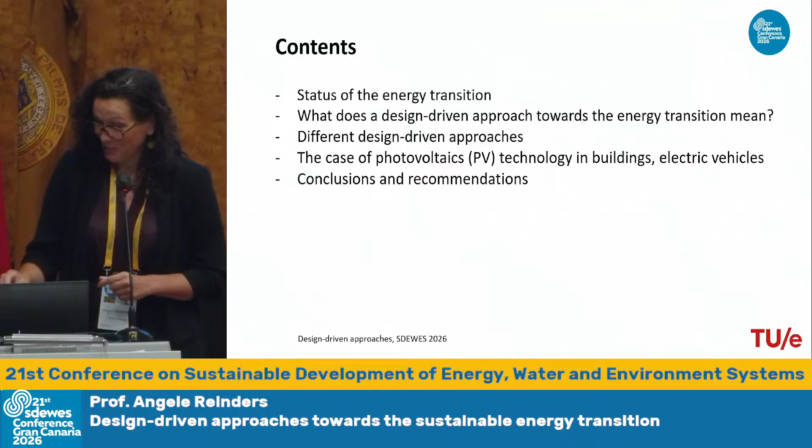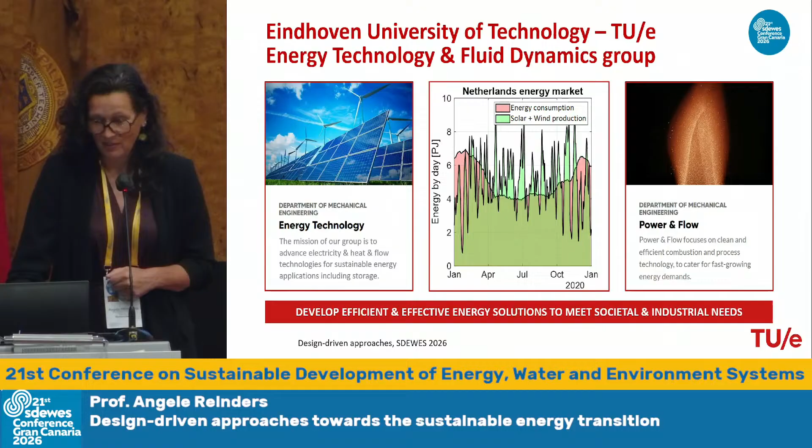But first, I'll tell you where I come from. I come from TU Eindhoven, and I work in the Energy Technology and Fluid Dynamics group, which consists of two different groups: one that develops sustainable energy technologies and storage means, and the other that works on combustion and making it more energy efficient, because in the energy transition you still have to deal with combustion. All that is meant to balance the Dutch energy system, and maybe also other energy systems abroad.

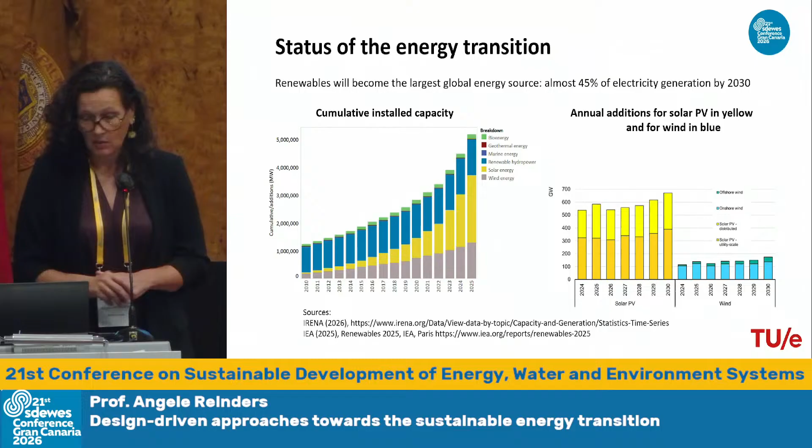Just a little update on the status of the energy transition, relying on the International Energy Agency and their beautiful reports. Actually, we're doing really well with the renewable energy transition—renewables are growing and growing. On the right you see the growth of photovoltaics and wind, and on the left, all the renewable installed capacity, which is going up exponentially. It's estimated that about 45% of all electricity generation will be renewable by 2030. That's really soon, so that's okay.

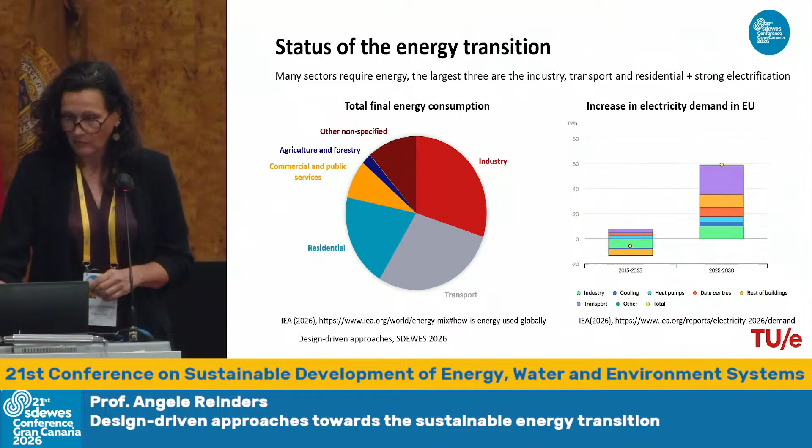As I mentioned, electrification of transport is a big deal, and we see a strong emergence of electric car sales everywhere. So car sales for electric transport are growing 20% globally. That's really a lot, and that means also that a large share of the car stock worldwide will be electrically powered. So I will come back to that later.

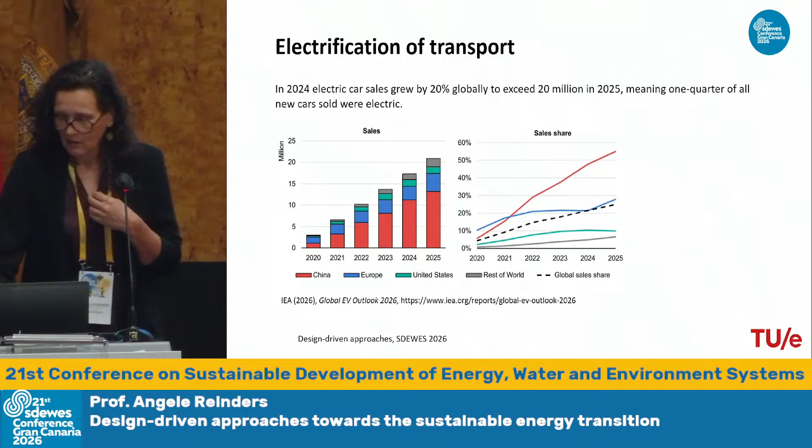And then there's a last development, that's grid congestion, because with all the changes in the energy supply and the large share of renewables, in some countries even close to 95%, like in Norway, but also in Germany and Netherlands, we have a lot of renewables. You see that the balance between production and demand gets a bit out of the expected.

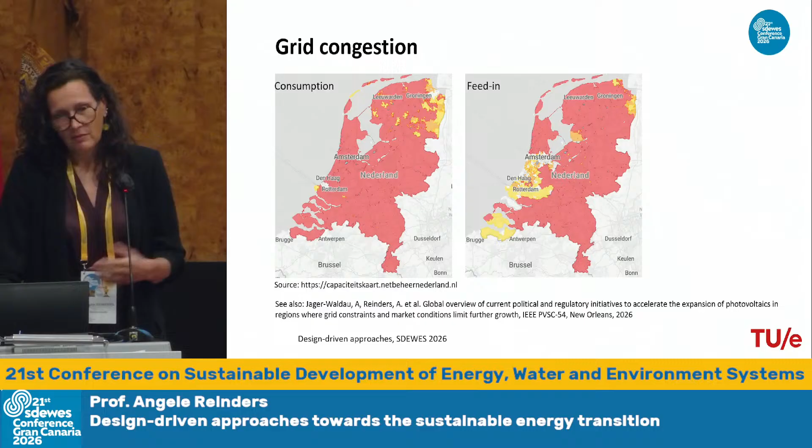Okay, so renewable energy transition is happening, and that also means that there's a lot of changes. And actually, I wonder then, in my research, what can we do to develop sustainable energy solutions that match with these trends that I just showed, and help to mitigate CO2 emissions, because despite all the renewable energy transition, we still have an upgoing trend of CO2 emissions, evidenced by measurements in Mauna Loa in Hawaii.

And I thought a lot about this, and I think about 12 years ago, I thought about another solution than just technology development. So I thought, sustainable energy is something we're going to need anyhow in the future, because you don't want to compromise future generations by the activities that we undertake now. That's according to the Brundtland report that was published in the 80s. But then, if you want to achieve that, then maybe you have to also consider how you change our environment and our system and our society in such a way that also serves our needs. And that can be done by a discipline called design.

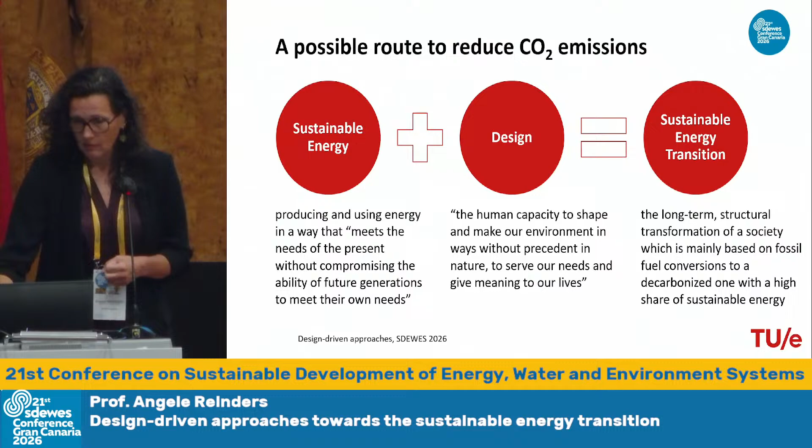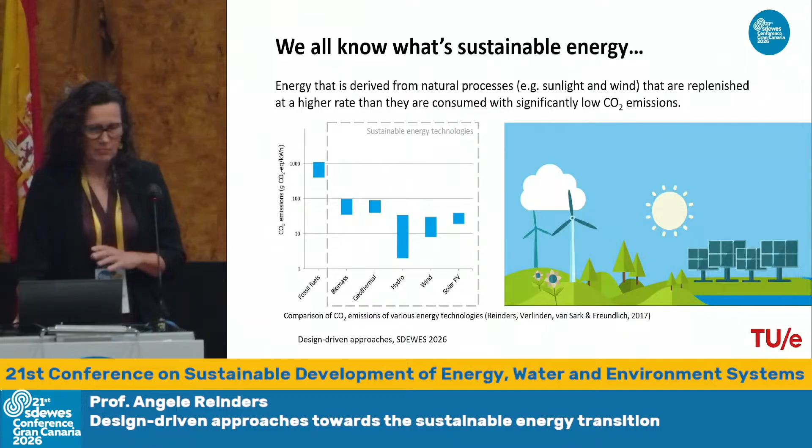So, in my opinion, if you add sustainable energy with the discipline of design, you can really enable a long-term structural transformation of society, which is mainly based on renewables, the sustainable energy transition. And this is, of course, related. Now, we all know what's sustainable energy. Sustainable energy is energy that's derived from a natural process that actually results in lower CO2 emissions than the traditional fossil fuel combustion systems, by a factor of 10 to 20 less. So I won't say that much about this slide, but the next slide is about what is actually then design.

And the discipline of design has a definition given by the World Design Organization that I show here. And it actually is a bit broader than you usually assume, because most of you assume that design is about making products, like for instance a chair or a table, but it's actually a strategic problem-solving process that drives innovation and builds business and leads to a better quality of life through innovative products, systems, services, and experiences. So it's much broader than just creating a chair and making it and using it.

And it actually means that those who can design have a transdisciplinary profession that harnesses creativity to resolve problems and co-create solutions with the intent of making products, systems, and services, etc. And usually it's indicated by a circular design process in which experience with existing properties of a current situation are evaluated by reflection. So you can conclude, for instance, using the example of a chair, this chair doesn't match the color scheme of my interior. That's a really important finding. It's also a value judgment. And then you analyze that, and then you compare different colors for the chair, and then recolor the chair.

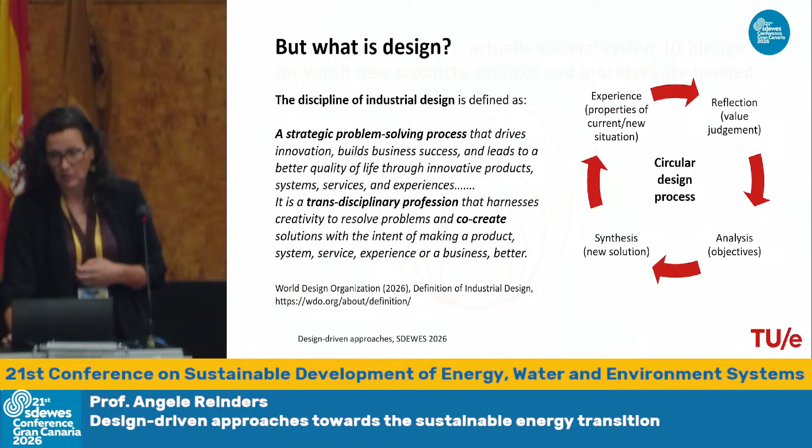Policies required to support sustainable energy transition. So the energy transition is not really a product problem, it's actually a societal system redesign that we have to go through. And for that change, we have to create new products, services, and processes.

And that's really well represented by these 4 design levels by Jones and Van Ael from University of Antwerp, where identity and artifacts are the first reason to design something, but that also can be seen in the context of products and services, in the organization processes, and then the systems and policies.

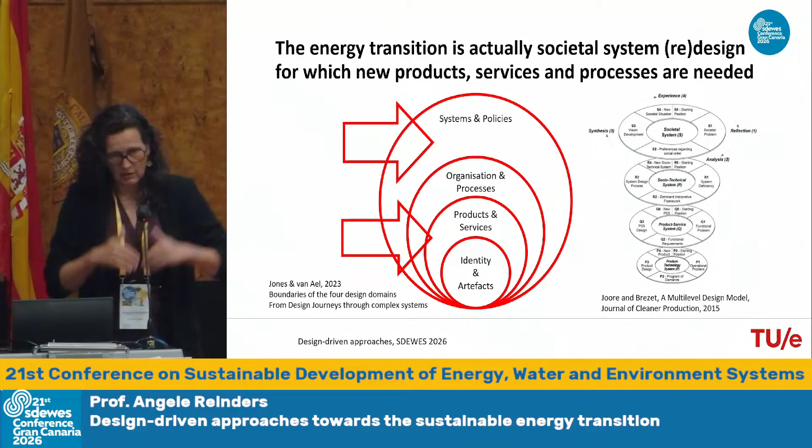And this can also be represented in more detail by a more complex overview, but also here you see the 4 levels. And then in every level you see the experience, the reflection, analysis, and synthesis. So it's all circular and it connects to each other at different levels. Okay, I won't bother you too much with all the details of all these methods, because there are many of those, I just showed 2 of them.

I would like to show what I did in this domain, and it's of course a very modest contribution, so I'm not going to say this is the final answer, but I just show what I've been doing in the past 20 years. And I will show some really old-fashioned slides from the year 2014.

I just guarantee nothing has been made with AI, it's totally human. All the illustrations are human-made. Yeah, so I had a really tense hand at a certain moment when making the slides.

So I want to tell something about the 3-layer model that could help with the energy transition, experiences I gained with an approach called Sources of Innovation, and then also I will show what you can do with the Innovation Flower. And the 3-layer model, maybe some of you know it. It's a model for sustainable energy environments that was offered in the ERANET program. So if you ever had an ERANET project, you probably have seen this.

And this actually is a model that says you have to combine markets with energy technologies and stakeholders in such a way that you can approach problems in the sustainable energy environment really well. And that was a model we worked with in a project on smart energy systems in the Netherlands and Austria. Very nice project.

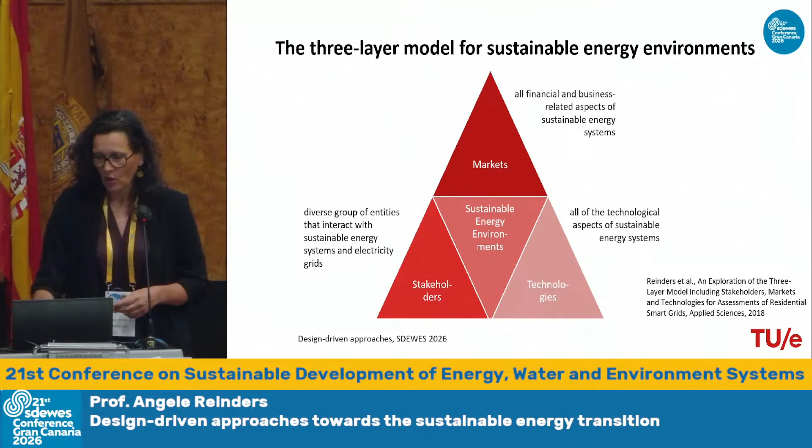That's a sort of home energy management product that can help consumers to make the right choices with use of the appliances and the use of the energy system. And it also gives feedback when they make a choice, then they can actually look at the Cube and get feedback.

At left bottom you see Bodhi. It's a smart home energy system also designed by students to give feedback on their energy consumption in an intuitive way by the color of the circle. So it shows where they have to reduce their energy consumption or increase it by the color.

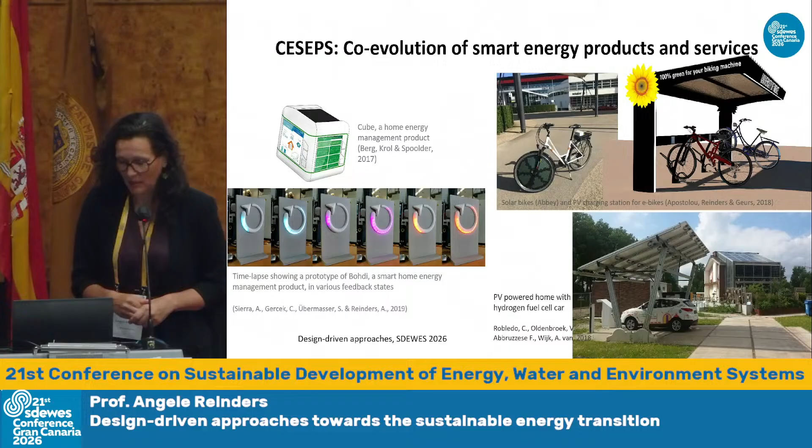Then at the right you see a solar-powered electric bike that can also be charged by a solar charging station. And at the right bottom, a home that was designed for TU Delft in Green Energy Village, which is powered by PV, and it also can produce hydrogen. And you see there a hydrogen car that we bought in the project, but we also designed hydrogen scooters, and they could be powered every day by this system. So it was really fun.

And besides that, we also did a lot of data analysis, and we looked at, for instance, electricity consumption in different smart grid pilots, and now you get all these graphs. But of course, in the end, you want to do something with the 3-layer model, and we put that in the perspective of the design cycle.

So, for instance, you see the cycle around it, which consists of a need, for instance, saving energy. That results in a design brief, like, for instance, design a home energy management system that can help to reduce energy consumption. That results in conceptual designs, products. If the products are great, they will be manufactured, they will be sold, and they will be used. And then again, you get from the experience a new idea on improvement.

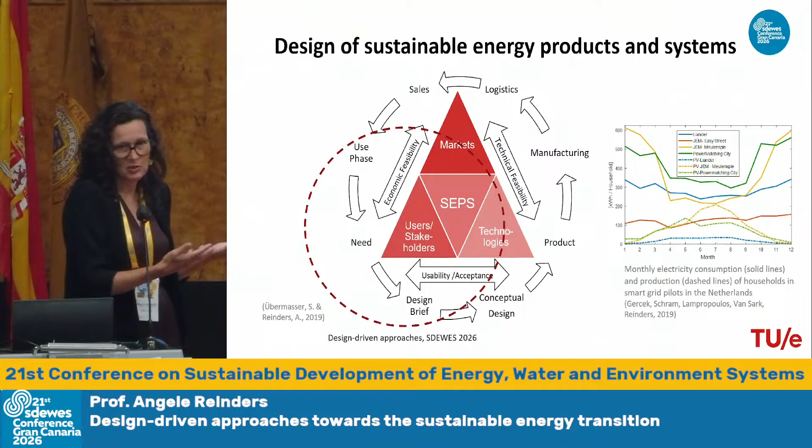So that fits in the scheme of the user stakeholders that have needs, in the scheme of the technologies that are actually embedded in the products, so either a home energy management system or a hydrogen-powered scooter. And then they are actually put in the market, that's logistics and sales.

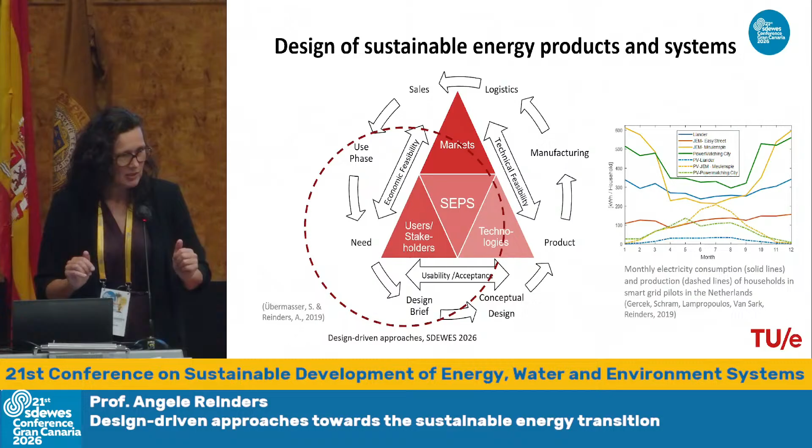And so it means actually if you want to work on good energy products and services for the energy transition, then you have to also consider economic feasibility, technical feasibility, and usability and acceptance. Well, sounds quite logical, but do you ever experience the 3 different layers in one single project that you execute for the research?

Now, besides that, I was also really heavily engaged in education, because I worked at University of Twente and also at TU Delft in the study programs of industrial design engineering. So I had to teach design courses, which I really liked, because actually before becoming an energy researcher, I was also in art school. So I thought that's really great. I can combine my creativity and artistic interest in my daily work. So I was really happy to do this. So I was very enthusiastic.

I set up a master course called Sources of Innovation, in which the design process was supported by various innovation methods to innovate better in the design process. And then I sort of, I don't want to say abuse the students, but I used the students to develop energy solutions, because that would also then fit the research that was executed in my group. And we wrote many papers about it.

So you can find a lot of papers on how to innovate with photovoltaics, how to innovate with sustainable lighting products, or how to innovate with fuel cells, because they resulted from this sort of educational projects. So every year we had about 30 to 40 conceptual designs originating from the course. And in the end, I also wrote a book about it called The Power of Design, that presents all the

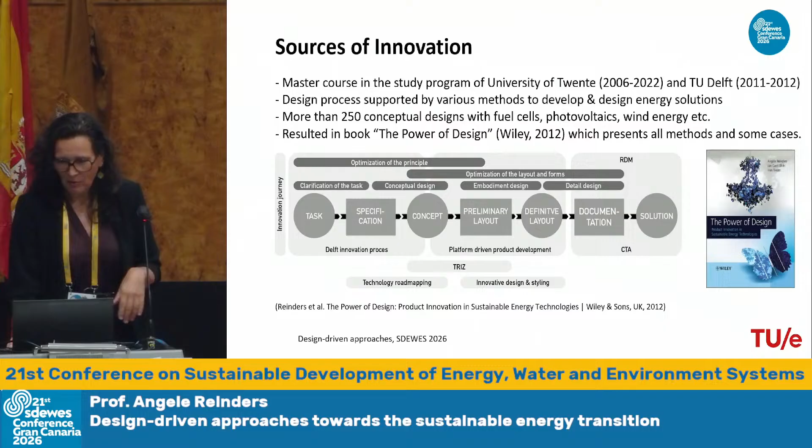methods and some cases. And you see here a design process in a linear way, just to make it easier to understand. So you have a task, specification, concept development, preliminary layout, and then selection of the definitive layout that will be documented for manufacturing, and that's actually the solution. And around that you see all sorts of names of methods and abbreviations. I won't go into detail with all the methods, because then I could speak a whole series of lectures. But I will just go through the topics that we dealt with to give you an idea what we have been doing. So this is one of the so-called outdated slides.

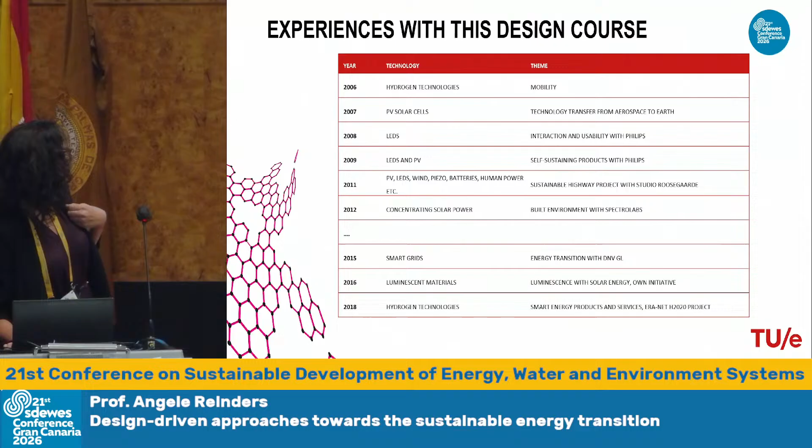So we started in 2006 with a project on hydrogen. Then we worked on solar cells, LEDs and PV, combined technologies in a project called Sustainable Highway. We worked on concentrating solar power, smart grid, luminescent materials, hydrogen. And thereafter, after 2018, I only worked on solar technologies, to be honest. So I thought it was not necessary to extend this table.

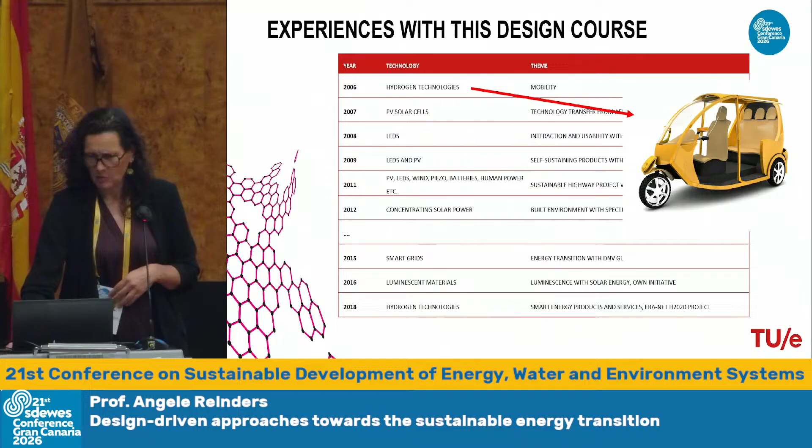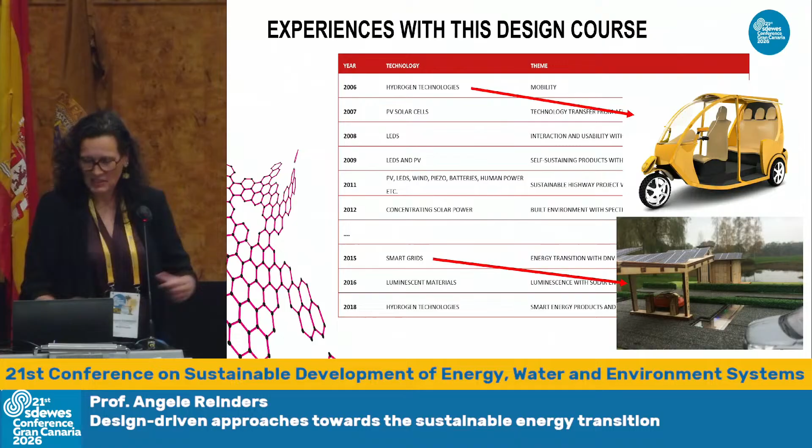But these sorts of designs resulted from the course, like really fancy transport means, like for instance this rickshaw, which is powered by hydrogen. Solutions for PV-powered hydrogen refueling stations with nice maquettes. So it was really lovely to evaluate these sorts of projects. It's all these nice tiny things that the students created. Concentrating solar power as lighting products for terraces. And also you can make tables that are self-powered by luminescent materials. You can charge your phone on it. And also really nice conceptual designs of PV-powered electric vehicles.

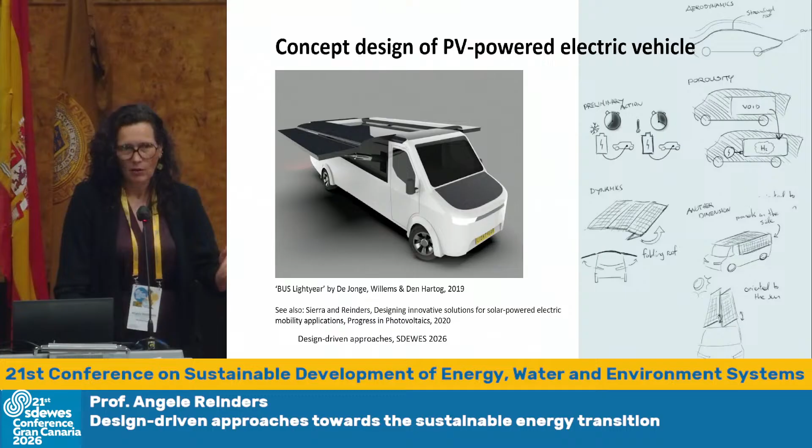And at the right you see some examples of the ideation process. Of course there's many more steps, but I could spend only one slide on this. And the resulting design is a bus that can actually power itself by extension of solar panels when it's in a parking mode. And this was designed in 2019, but I have to say, recently I saw somewhere in the news a serious commercial product that has this design. So the ideas that the students generated several years ago also find their way nowadays to reality, and that's quite interesting.

Okay, now from all this, at a certain point I thought, what can we learn from these sorts of approaches? So then I developed the innovation flower, which is based on an interdisciplinary design perspective. And I show the innovation flower in the context of photovoltaics because it's easier for me to explain it. But the innovation flower is actually an interdisciplinary map with flower petals that each represent factors that are important for the design of a product that contains a certain energy technology, with the assumption that these 5 aspects are also important for any other commercial product in the market. So you always have to cover these 5 aspects to develop something that will be sold and used. And these aspects are technologies.

So you want to have the right materials, certain performance, and comply with standards. The other aspect is financial: something must be produced at a reasonable price. In case of energy systems, LCOE must be a good match with competitive alternatives, and there must be business models. Then you have a societal context, like the policy that drives the energy transition and CO2 reduction, regulations, law, environmental laws, and also communities that can connect to new developments.

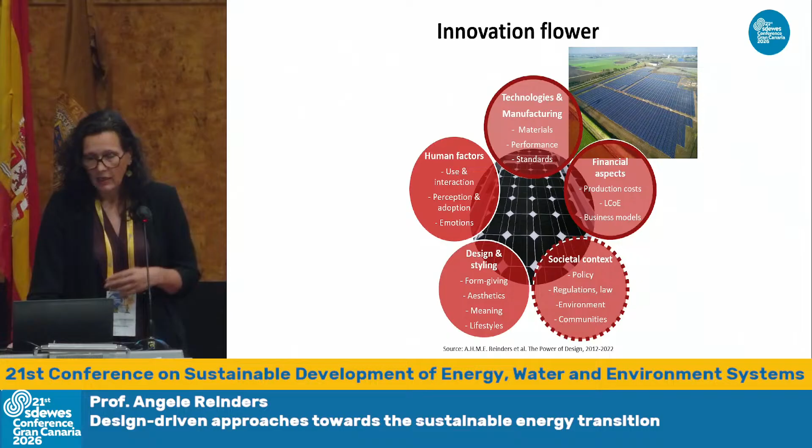These three aspects have been applied a lot to all sorts of energy technologies, but the other two have been omitted for a while. These are human factors, the factors related to use and interaction with things, perception, adoption, and emotions going with the use or perception of objects, and design and styling. Design and styling is actually form giving, the use of shapes, color, and tactility for aesthetic appeal, for giving meaning to things, and to connect to lifestyles.

In this slide you see several examples of designs of solar-powered things: a window, a bicycle shed, a BIPV system in a villa in the Netherlands, Stella Terra - a PV-powered car from my university made by a student team - and a solar-powered chandelier. They all match these five criteria: the technologies work, they can be made at a reasonable cost, except for the chandelier, because as an art object that's the exception. They are meant to reduce CO2 emissions, they have nice design and styling, and the human factors have been taken into account in the design process.

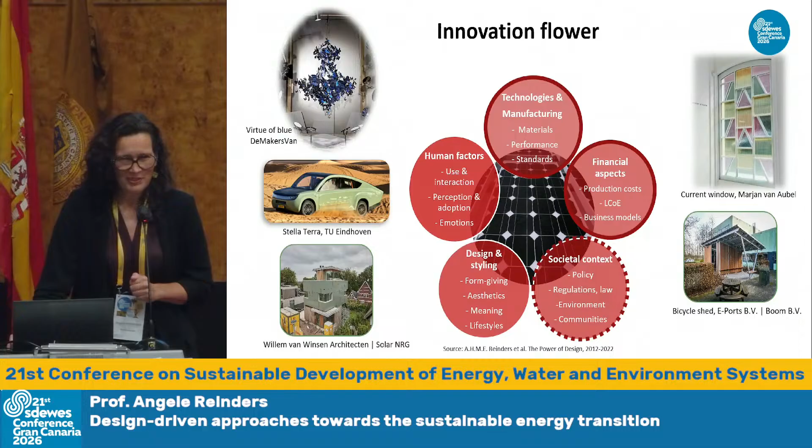Now, I show this for solar technologies. You can also apply this elsewhere - I did a little exercise yesterday evening because only solar is a bit too monodisciplinary, so I made a slide for wind turbines.

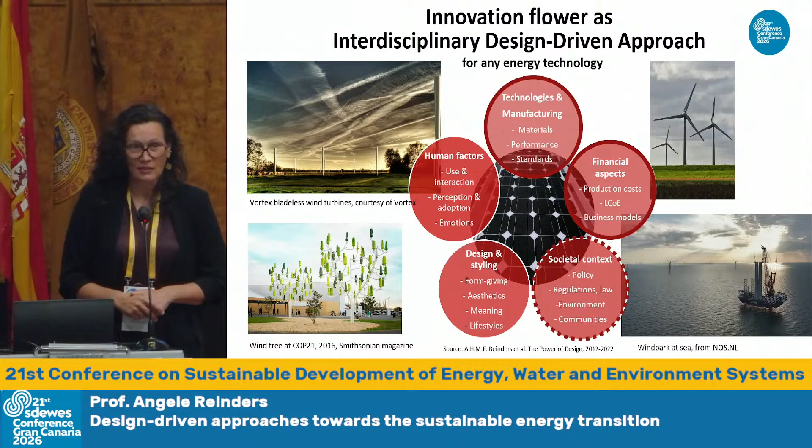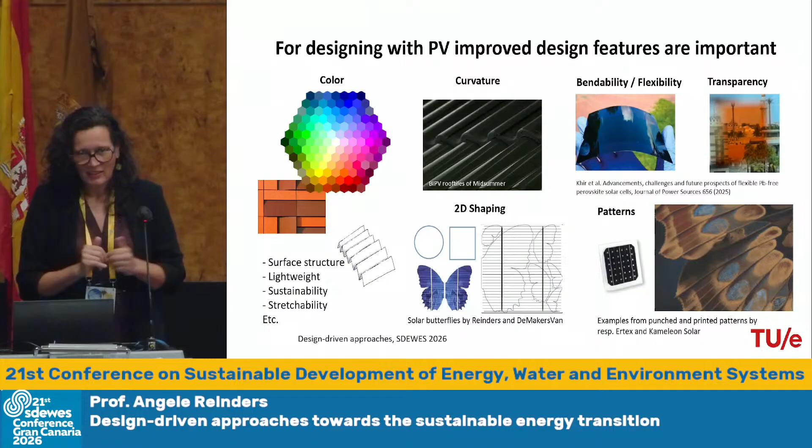Okay, now some additional information on design. I'm going to focus on photovoltaics only because then I can go into more detail. But for you in this meeting hall, if you want to apply this to your own energy technology, please feel welcome to do so, and do this exercise also when you get back home.

It's always possible to add design features to technology. Like for instance, for photovoltaics, you can add color, you can create curvature, you can add bendability, flexibility, you can create transparency, you can pattern by prints, you can apply 2D shapes, 3D shapes, you can make them lightweight, you can make them more sustainable by the right materials, you can make them stretchable. That's all possible if you want to do so. And in the PV sector, many people are working on this.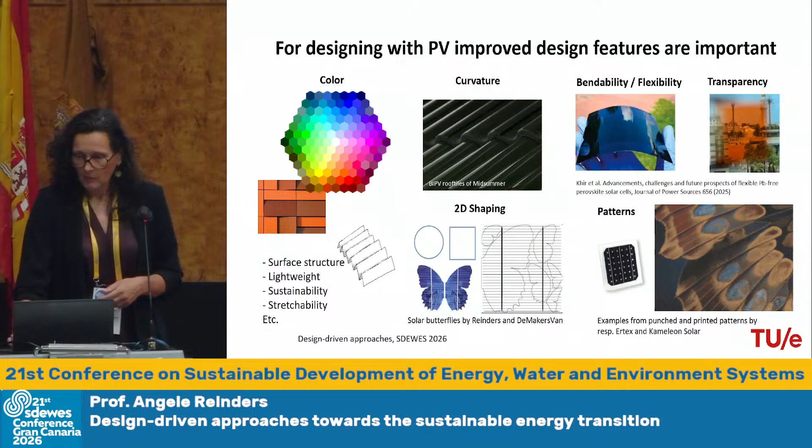To help myself figure out what's going on, I made a table for my book, The Power of Design, and also for designing with photovoltaics. I put all the PV technologies that exist, ranging from cadmium telluride to amorphous silicon to crystalline silicon, and then compared their typical sizes, whether you can pattern them, whether you can change their shape, whether they're flexible, whether they can be colored, whether they can be made transparent, and put that in the table - just to help engineers and designers make selections.

Of course, these sort of features are changing the whole time, so maybe there's now new technology with other features. But what we see in practice at the right is all sorts of colored PV application buildings nowadays. They can be made in terracotta color, they can be made transparent, they can be made blue, they can be made in sort of glitter structure, like at the right side there in Copenhagen.

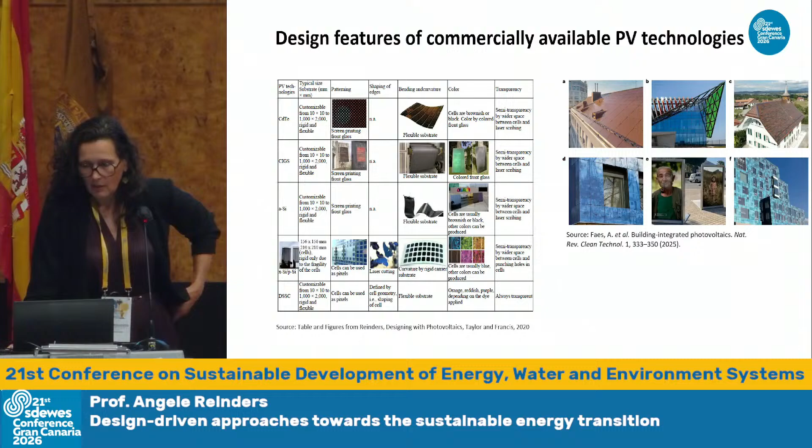So there's all sorts of possibilities. And it also requires that if you have these design features and you want to improve the design of energy products, buildings, and automotive applications, they have to work with multiple stakeholders. Because besides the PV sector in this case, other sectors also contribute to the development of these components. And I will show that in the next slide. So this requires interaction with new stakeholders in other sectors than the energy sector.

That's also necessary because you have to homologate the new solutions, because anything that's been designed and put on the market must get official approval or certification by certain authorities—different for the building sector than for the automotive sector—to let a product be allowed on the market, ensuring that it meets safety, technical, and environmental standards. I'll show the next stakeholders on the next slide.

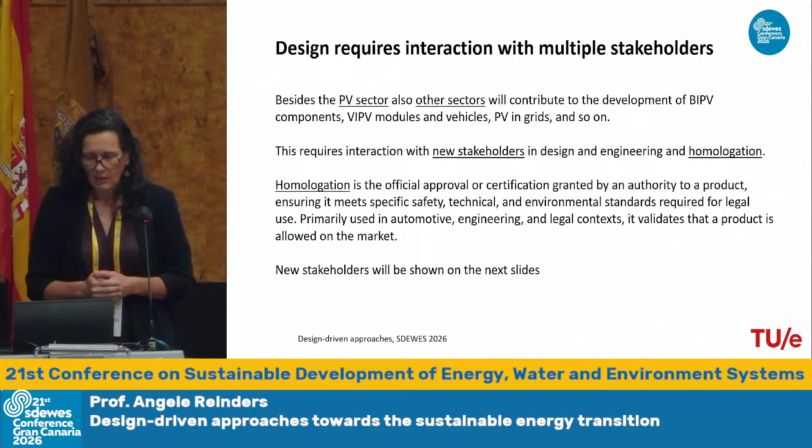For instance, if you look at building integrated photovoltaics, in red you see the regular stakeholders that actually collaborate with the PV sector or come into the PV sector in this sort of project. So for instance, you have PV module manufacturers, legislative bodies that work on building codes to make sure any energy technology in the building meets the building codes as is common for all building materials, and policymakers who want to create net zero energy buildings and develop laws that help further integrate and implement renewables.

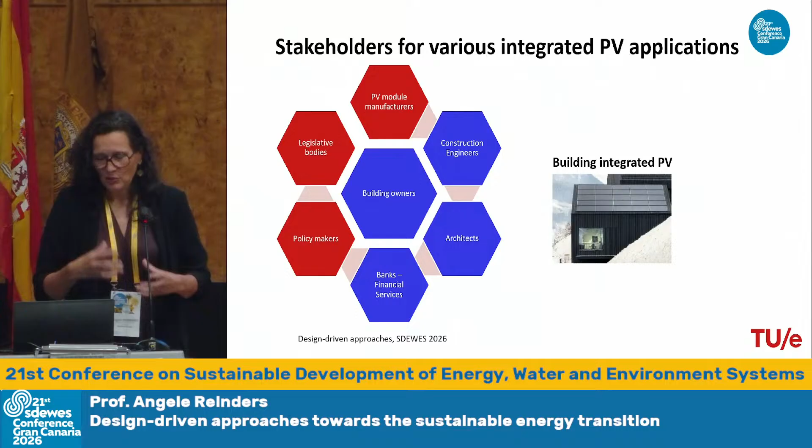But also we have building owners—usually they don't know that much about solar technologies or energy technologies in general, and they have to go through a learning cycle. You have construction engineers, architects, and also banks and financial services that have to fund this sort of project. If you talk about commercial buildings, those are big investments. So all these stakeholders have to work together, and that's really a challenge.

The same goes for PV integrated in cars, called vehicle integrated PV. So we have module manufacturers, legislative bodies, policymakers, consumers, PV cell manufacturers, but also automotive designers and automotive manufacturers. The automotive designer wants to create a car with good aerodynamics, but also needs to integrate the new solar technology—it's a big challenge for this person. And the same for the automotive manufacturers.

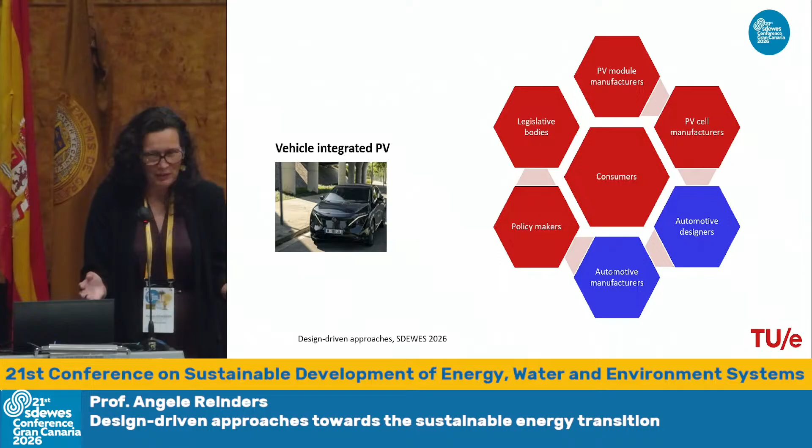They have to manufacture a component that's actually an energy component. Do they want to manufacture that themselves, or do they want to buy it in? At least they have to include it in the design and in the manufacturing process, which means changes in the manufacturing line.

And then coming back to the more traditional approach, PV in grids—also here we can see this sort of complications, because multiple stakeholders have to collaborate. Not just the PV module manufacturers, the legislative bodies and policymakers, but also the solar park managers, the electrical engineers, the banks that invest in solar parks, and also the DSOs and TSOs. They also have to deal with this, so they have to develop a common language and a common understanding.

You don't see each other anymore as enemies, like the DSO doesn't need to see the solar park as an extra factor that contributes to grid congestion. We can also think it helps to make the grid more renewable. These sort of issues are really interesting, and a challenge for all of us, I think.

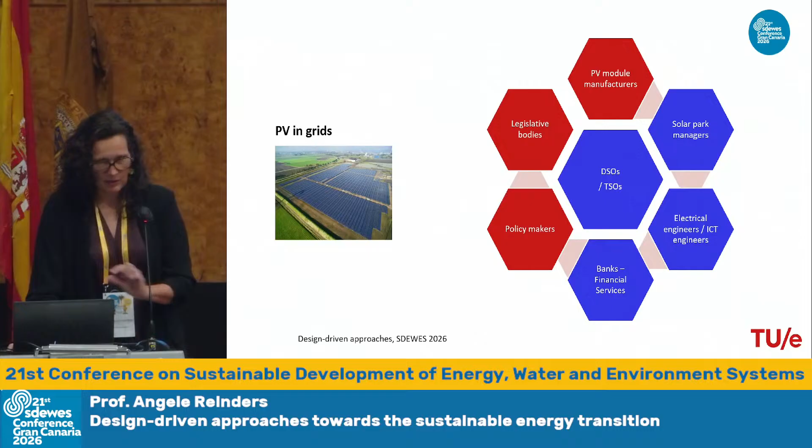Okay, I have another set of slides left on building integrated PV. I will go through them really quickly just to show some features that are related to design and the specifics of PV in buildings. But I'll go through it quickly, and there's also a paper you can read afterwards if you find it interesting—I'll show the paper and the link on the last slide.

So for building integrated photovoltaics, there are many places in a building where you can apply PV: canopies, roofs, curtain walls, awnings, facades, also on walkable floors, balconies. So there are many options to apply them.

I think it's really important for a designer to be aware that there are different approaches. For instance, you can design iconic buildings—really grand designs like a football stadium or a university or school—or replicable buildings, like a residential home or a holiday cottage that can be replicated multiple times. For these applications, you also have different module types, like standard PV modules that are just blue or black, or dedicated BIPV modules that can be colored or transparent and have special features.

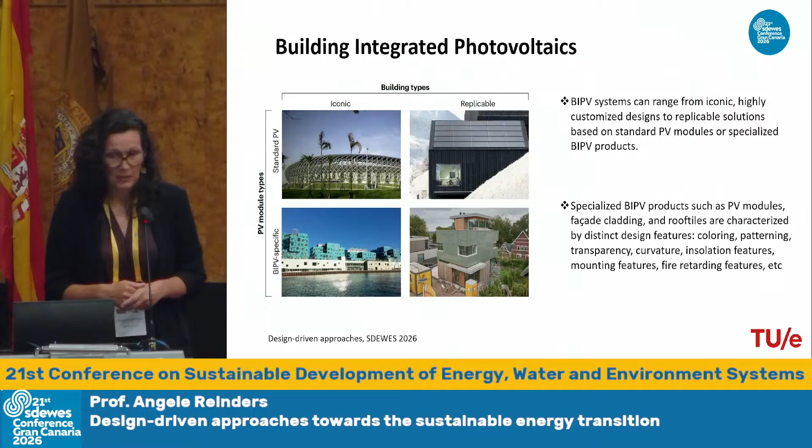Also features related to the building design make this really interesting, because you see a historical timeline here of BIPV projects that starts from the 1970s. The first solar home in the US looked quite technical—a system integrated in a roof with a lot of aluminium bars. I don't think it looks very beautiful, but it worked quite well.

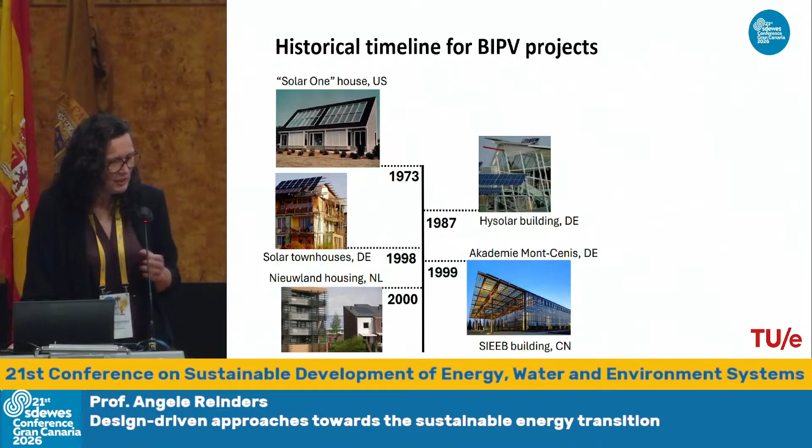What you see then until the year 2000 is a lot of square, rectangular designs with greenhouse-like construction parts. But thereafter something changes and you see more color and shapes, like for instance in La Seine Musicale in Paris, and prints on facades, like on the solar facade of Soltech. There are also solutions for heritage buildings that are indistinguishable from traditional building materials.

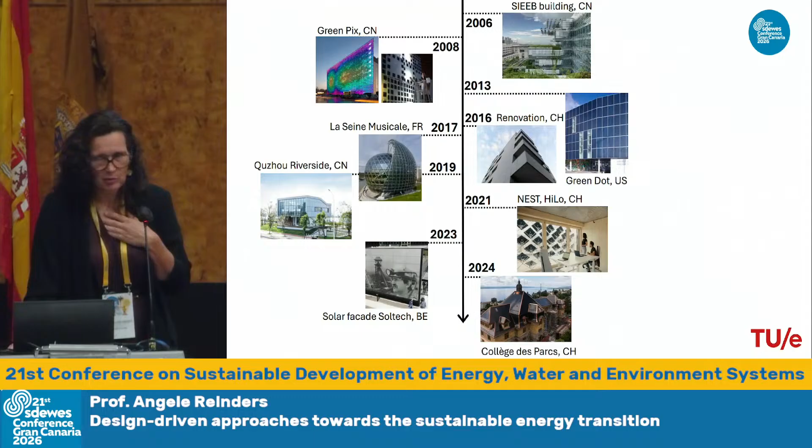It's super interesting, of course, for energy production. Here are some daily power productions shown for different sides of the building—west, south, east, and north—and at an optimally oriented roof.

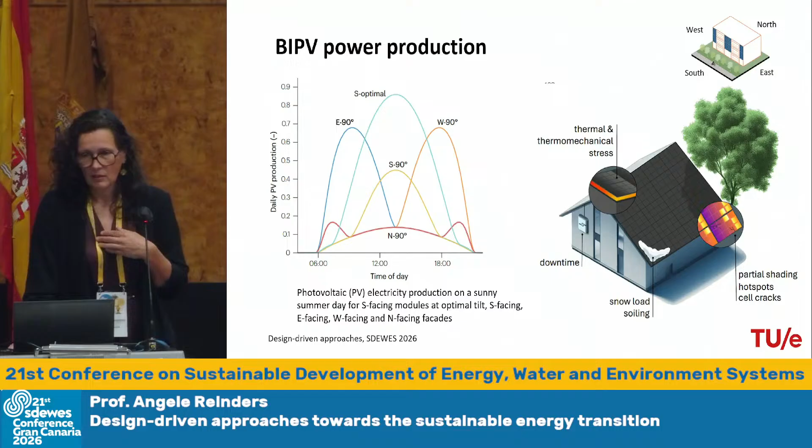There can be issues, and any design has to take into account shading, thermal and other stresses, wind stresses, snow loads. It's all relevant for this sort of design, and it goes actually beyond the common energy application.

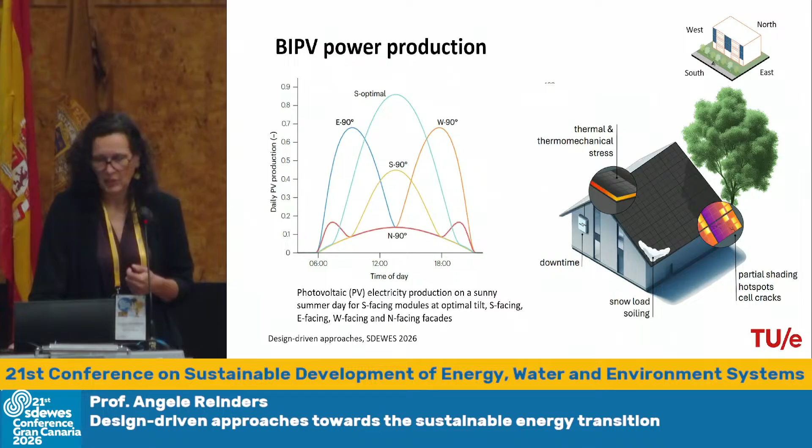Now, of course, you have to take into account cost. What I find really interesting about these graphs is that for different parts of the building, like skylights, rain screens or roof tiles, you have a different price range, going from something like 100 euro per square meter up to 700.

But in the lower price range, this is competitive with conventional PV. So even if there are some objections against this from a cost perspective, I would like to say that's not true, because this is already feasible from a financial perspective.

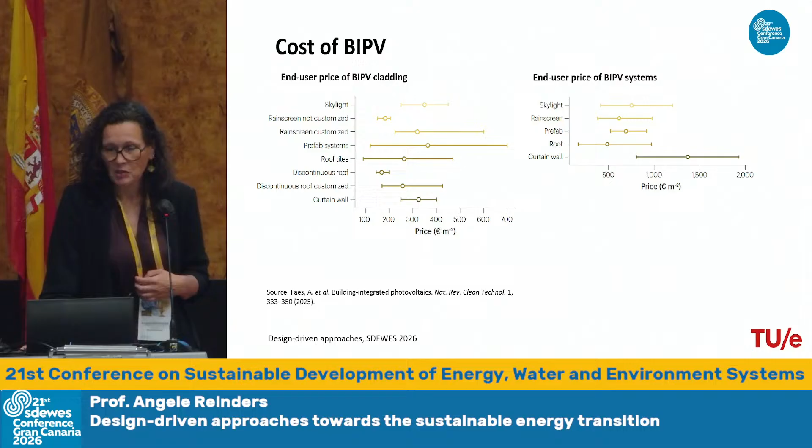If we look at CO2 emissions, it's often mentioned that in the design of building integrated PV, CO2 savings will be too low. But you can see at the right the emissions of the electricity mix in Europe for different countries—it's quite high. And at the left, for all sorts of orientations of PV in building parts, like an optimal orientation for flat roof, 90 degrees south, west and north, in most cases CO2 emissions are lower. So there's always CO2 reduction possible in this case.

In which country do you live? Well, not in Norway, of course, because there you have a lot of hydropower, but let's say in 90% of the European countries this holds true.

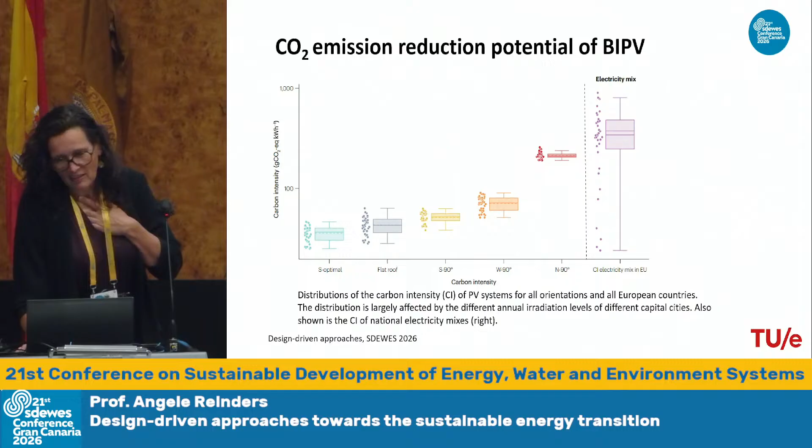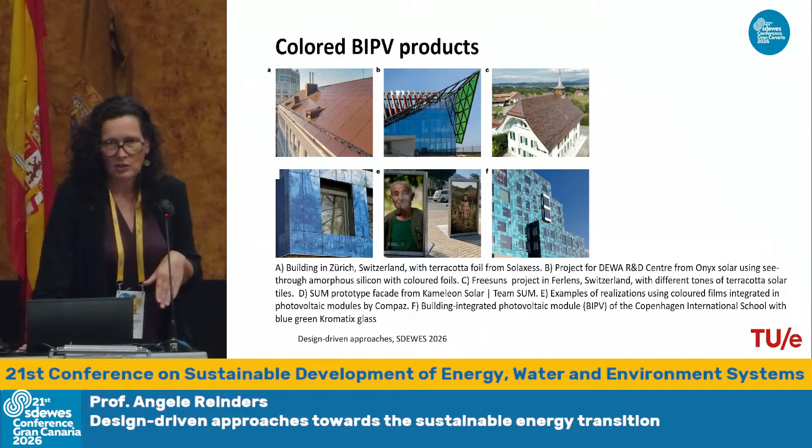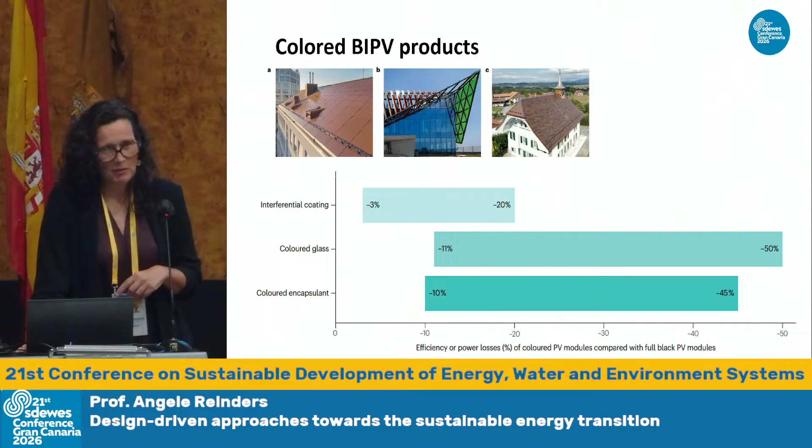Okay, color PV—I showed this illustration already, but I come back to it because if you want to color solar technologies, you have to add either coatings, colored glass, or colored encapsulant, and that reduces the power output, of course, because less light will reach the solar cells. But if you make wise selections, this power reduction can be limited to something like 20%. That's great, because as you saw, the CO2 emissions are very low and also the costs were very low, so this won't dramatically affect the overall performance of this sort of application.

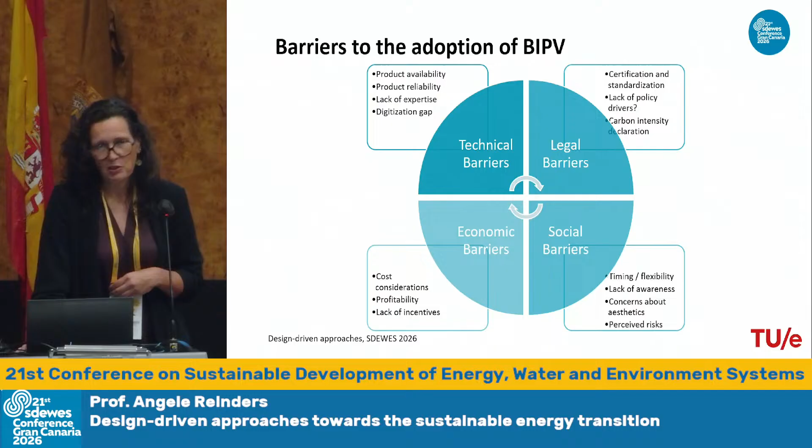Coming back to the societal aspects, there are a lot of barriers, of course, to this sort of new development—technical, legal, societal and economic barriers. This scheme shows that there are barriers perceived, but also barriers that can be overcome, like aspects related to product availability or lack of expertise. So I think in this domain, to make it more accessible for everybody, we have to work on training and on standardization, and create awareness about the real cost, the real CO2 emissions, and the real performance with regard to efficiency, because there are a lot of myths that it doesn't work.

That's why there's also a lot of policy and regulation from the European Commission that helps support this sort of design approach for PV, like the EU solar standard, regulations for nearly zero energy buildings that are compulsory for all new buildings, the European Solar Charter, the new European Bauhaus, the Net Zero Industry Act—all of that helps support this energy transition. And also, what we do, we develop design guidelines.

This is an example of a design guideline developed by one of my PhD students. She also works in Florence, so it's a collaborative project with Italy. We worked on a design framework that can help architects, construction engineers, organizations from the financial sector, and also organizations and people related to city management, to better guide the design of PV systems in buildings.

And the innovation flower that I just showed serves as a background in this process. This will soon be published, so it's on its way, and then I can also share the full method. But I want to show here that also here you have this situation where you have a strategy, then analysis, selection, and alternatives, like in a real design cycle, but then structured in a framework that can hopefully be understood by many different stakeholders.

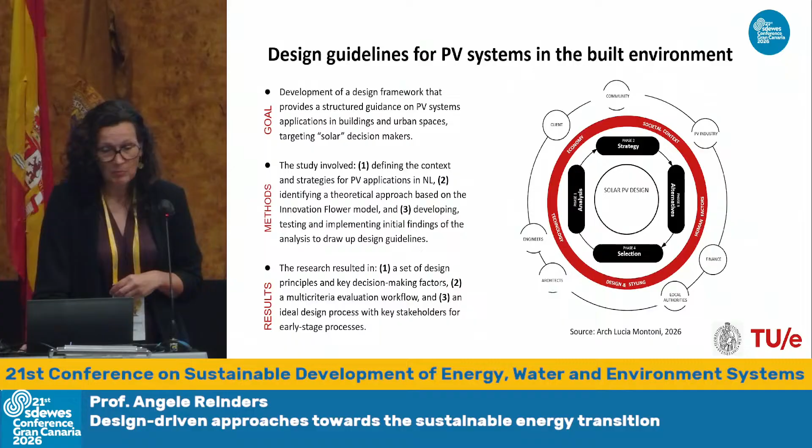I'm just going to wrap up now, since I'm at the end of my speaking time. So all this is now being applied in a project that I'm engaged in with 4 technical universities in the Netherlands. It's called the Heritage Program, and this is about the issue of urban overheating.

It's a project on how to prevent citizens living in aging built environments from suffering from heat under climatic changes. What we want to do in this project is develop new design solutions. Of course we want to conduct research, and we also want to develop a warning system.

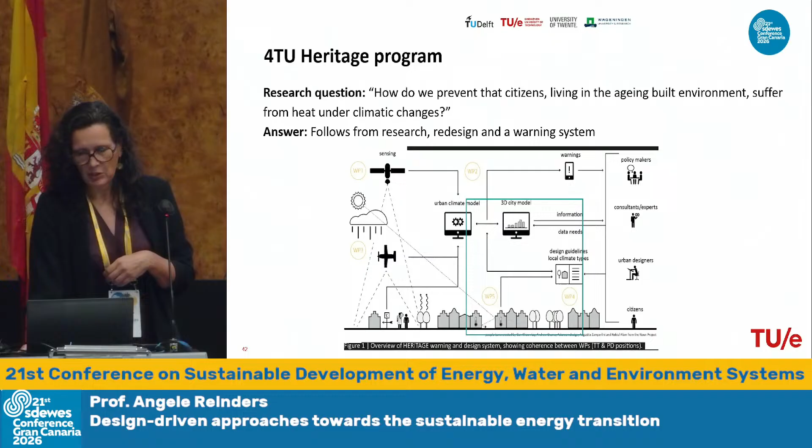In this project we have many research questions, but I just want to emphasize that besides all the questions about remote sensing, how water bodies contribute to cooling, and how we can reduce the heat flux incoming to the city, we specifically work on energy solutions with solar energy technologies in the redesign of buildings and neighborhoods.

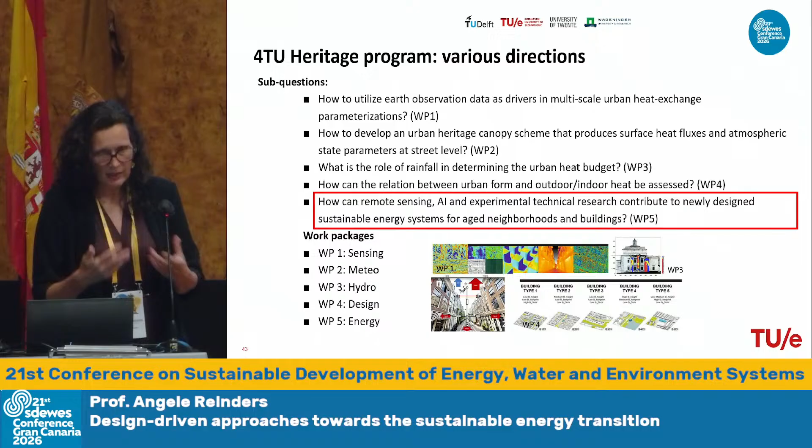I think this design-driven approach, with different researchers from different disciplines as a background, can really help develop solutions that find their way into a system change that we need for the energy transition. Okay, I'll end with a few examples of solar-powered electric vehicles, since that was also a topic I worked on for the past 10 years.

There are 2 possible solutions for making electric transport more sustainable using solar power: one is to use solar charging stations, and the other is to integrate photovoltaics into car bodies. These examples were investigated in my group.

The main reason to do so is in particular because the emissions of PV systems, at just 30 grams CO2 equivalent per kilowatt hour, are way lower than the emissions of the grid in the Netherlands, and also the European grid, in particular the grid in some Eastern European countries.

Also, if you think about how much power you can produce with PV modules and compare that to the drive range of a vehicle, it's really possible to drive solar in the Netherlands with an irradiation of 1,000 kilowatt hours per square meter, because you can gain 4,000 kilometers per year by producing solar electricity for your electric car.

And it becomes even better if you go to places like, I think, south of Italy, north of Africa, or Australia. There you can drive 10,000 kilometers per year on solar power.

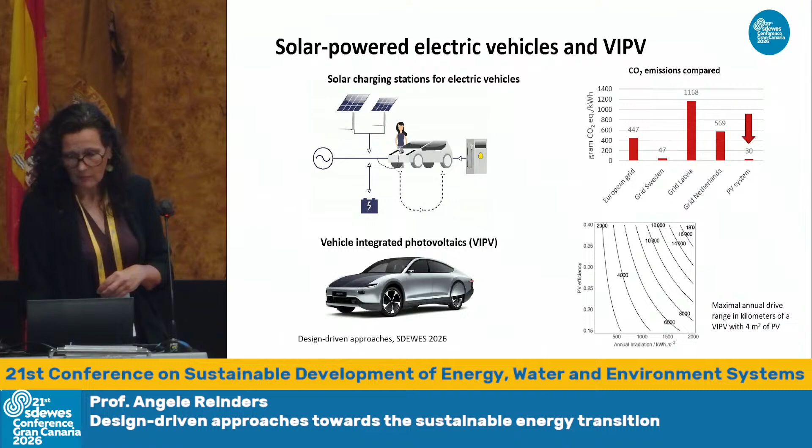So it's really interesting. In my group, we developed models and tried to be interdisciplinary, modeling this in a technical way, an economic way, and an environmental way, and compared solar charging of electric cars with a little bit of charging by the grid for difficult months in the year. In the Netherlands, for instance, we don't have much solar power then.

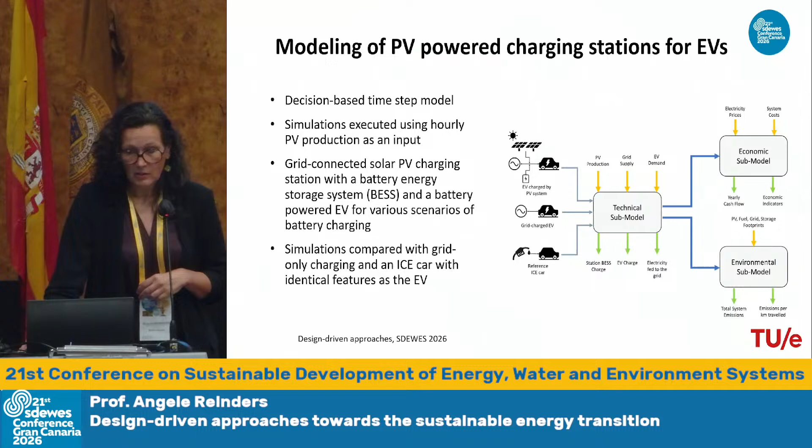We compared that with grid-powered electric vehicles and gasoline-fueled cars, and found that for different countries like the Netherlands, Norway, Brazil, and Australia, you get different results. But for most countries, with a very small array of about 2 to 3 kilowatt peak, you can charge your electric car over the whole year.

This didn't work for Norway, because a lot of power there is produced by hydro, which is much more competitive than PV. But it's one of the few countries in Europe like that, and most countries don't have hydropower.

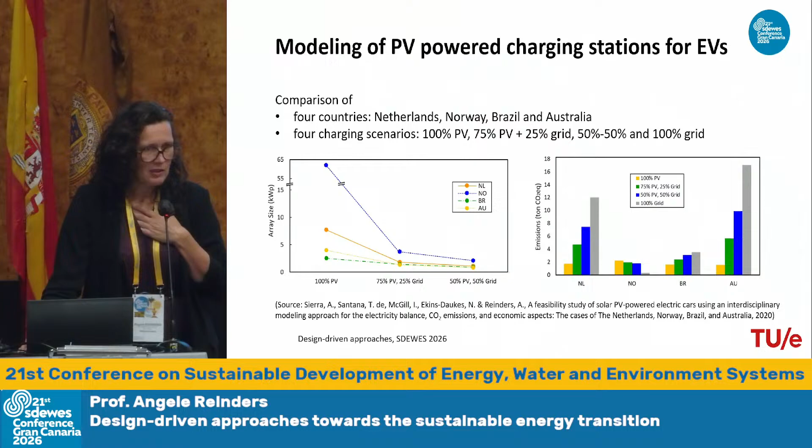Knowing this, there has been quite some development in vehicle-integrated PV, starting from cars for the solar challenge, which are racing cars, to cars made by manufacturers like Audi, Sono, Toyota is working on it, Lightyear, a Dutch company, and also Nissan and Hyundai are really working on this sort of solutions. Here we see already first commercial applications in the market.

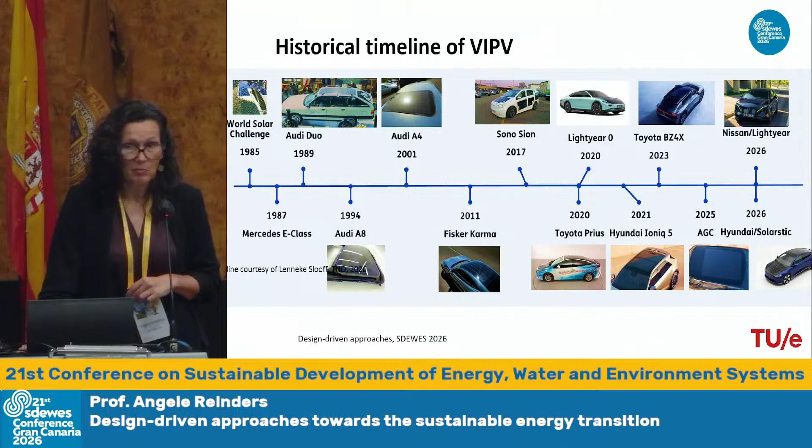It's really great, but there are some issues with the design, and a lot of research is being conducted now in Japan, also Netherlands and Germany, on getting PV cells into body parts of cars. You have to distinguish between roof integration and hood and side integration. The funny thing is that for both parts of the car, you have different design requirements.

So it makes it extra complicated, but you see advances. For roof integration, you need curved PV, it must be oriented towards the sun, it must be very rigid, impact-proof, stable. If you add it to the sides of a car, it must be pedestrian safe, and therefore also preferably glass-free, because you don't want impact and then hurt people with a lot of glass.

So all this is being developed at the moment, there's no final solution, but I showed two examples of cars that have or had PV in their body parts, and I think it looks just great. I mean, I could drive with such a car.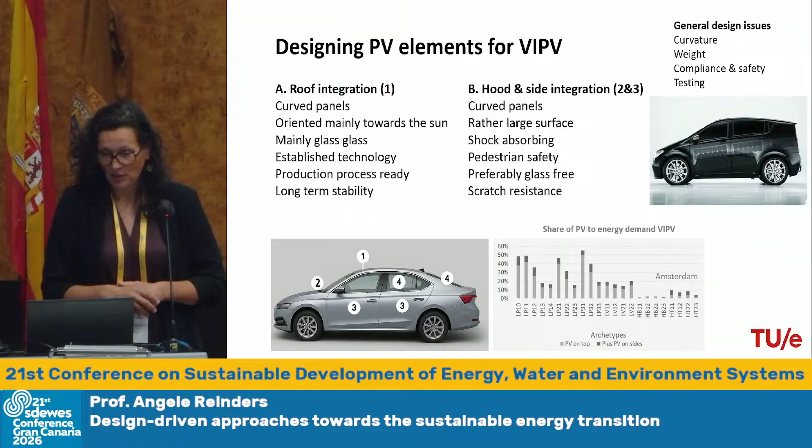Okay, so now we come to the conclusions. It was a very long talk, I'm aware of it. Sorry for talking long, but I hope I convinced you, not by talking long, but also really by the content, that to enhance the energy transition, you have to better integrate sustainable energy in products, buildings, and cars, and other things.

But then you have to apply design approaches, and that means that you have to engage other stakeholders than just the researchers, the designers, or the engineers. And you have to think about advanced or enhanced design features for energy technologies. So I think that's the message I want to convey for now.

And I also have two recommendations. I would like to ask you maybe to try once, maybe twice, to apply design-driven approaches in your own projects to see what it yields and whether you get other insights. And I think also, to make this work better, we have to develop new methods, especially at the level of system design for the energy sector, in collaboration with stakeholders, and really redesign our energy transition. So, this is another slide.

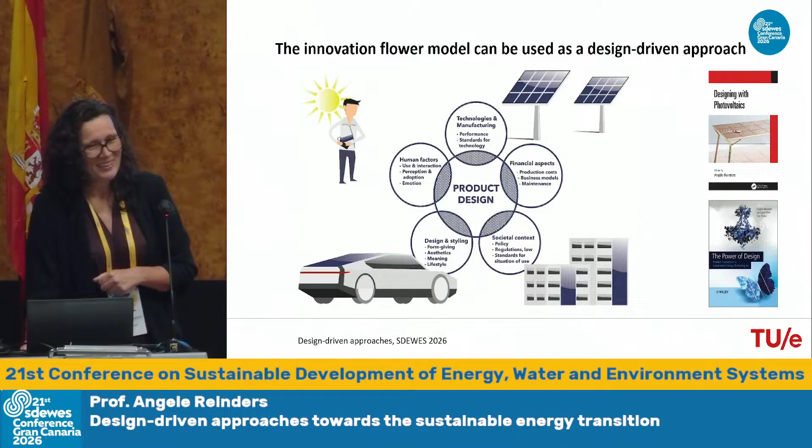So if you want to do this, you can use the method, and you can also maybe read my books. It's not an advertisement, but the methods are really well described in the books. And I would like to acknowledge many people, like all the students who contributed to design projects, and all the collaborators in the various projects that were represented in the slides. And I would like to thank you for your attention.

Thank you for this inspiring presentation. I'm really a supporter of the design-driven approach. I also always believe that beauty has a very huge impact on the social acceptance of technology in general, especially in case of renewables. Let's see if we have some questions from the audience. I see several hands. We have just seven minutes, so I suggest you be very short in your question. Thank you. Okay, let's start with Professor Kılkış.

Thank you for a very insightful presentation. This is Birol Kılkış from Ostim Technical University. My question is about, in line with the design approach, did you or are you going to consider solar PVT systems, innovative systems, as part of providing not only electric power but also heat, which according to my research in collaboration with the TU Delft Solar Village, is feasible, at least environmentally feasible, up to Delft or even up to Amsterdam, to use PVT panels.